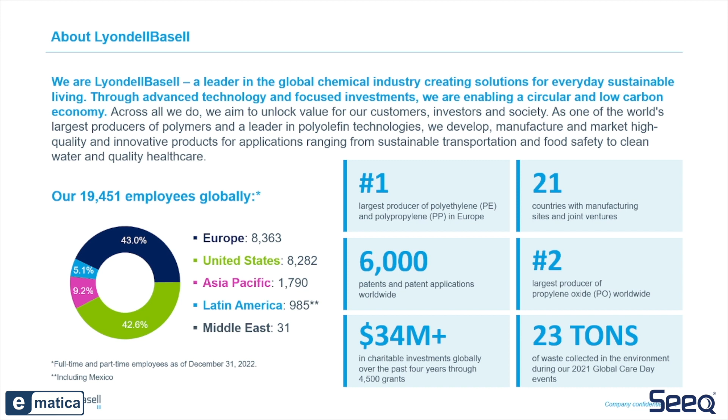Good morning, everyone. Thank you, Ematica and Seeq, for inviting us. We are LyondellBasell. Just a few words about the company for those who don't know us. We are a company that's going through a huge sustainability revolution like all chemical industry companies. And despite that, we are among the main leaders of polyolefin manufacturers in Europe. We have 20,000 employees distributed between the United States and Europe and a small percentage in South America and Asia.

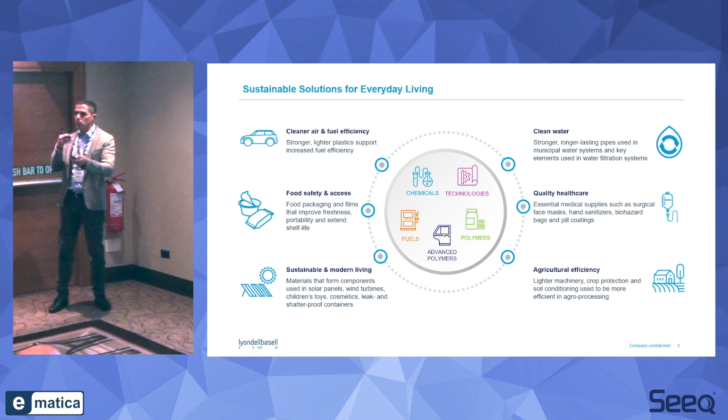Where can you find our products in your daily life? Pretty much everywhere. In cars, both inside and outside. In food products for food safety and access. Caps, closures that you find on bottles, for example, or yogurt packagings. Healthcare, so hand sanitizers, biohazard bags, pill coatings, renewable energy tools and parts of machinery. So pretty much everywhere.

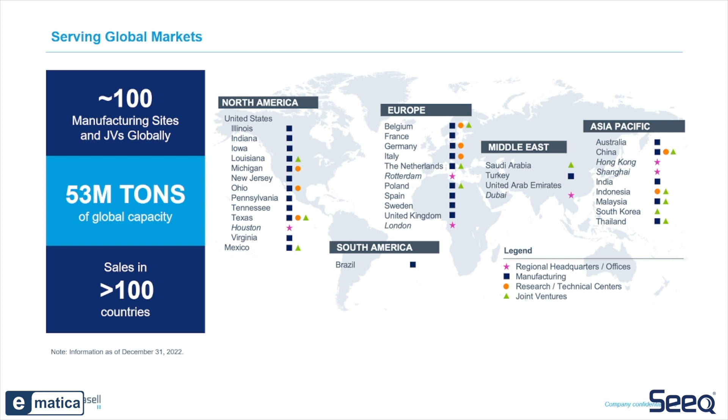And where are we? We have more than 100 manufacturing sites all over the world, with more than 50 million tons of global capacity. We work in Ferrara, the main site in Italy. And in Ferrara, where we work, we have one of the main research centers. Let's switch to our use case, which was started from the need to have a predictive machine for hazard situations. Marco is going to explain you later how the server works.

We used our data structure. We are very old PI clients. And after PI, we have an AF server. And data are collected from different sources, from an OPC server in our case. And above AF servers, we also have a couple of servers, Seeq server and a Data Lab server. And that's because our data are confidential. So we need to have our data infrastructure safe.

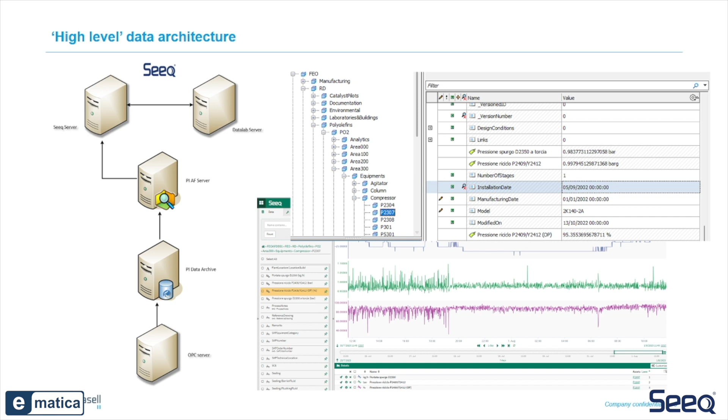This allowed us to import data very easily. We imported some data from PI, but most of the data were imported towards AF, which is way more comfortable to do, so that with Seeq and its Workbench, we could work on them. Now I'm going to leave the floor to Marco, who's going to tell you more about how we did it.

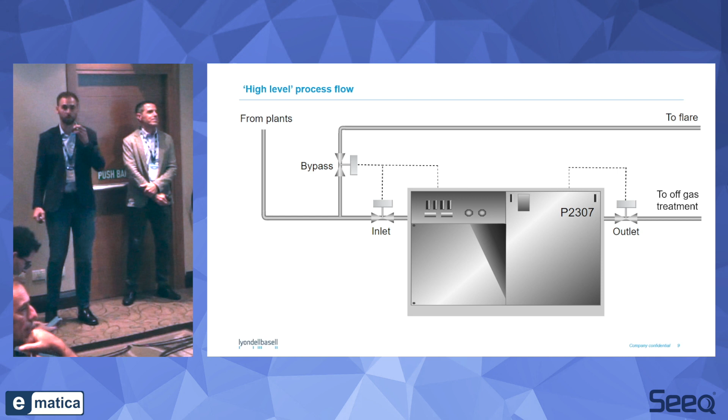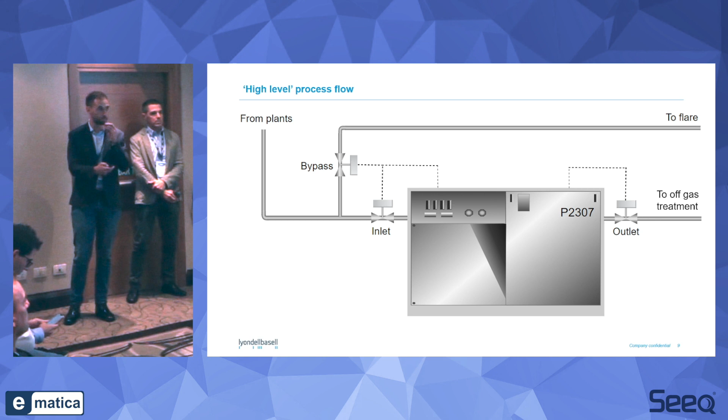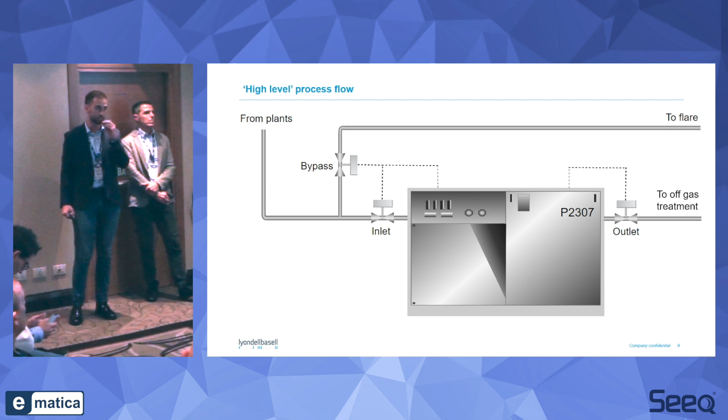Thank you, Roberto, for your introduction and for this overview about the data architecture. My name is Marco Bassetto, and I deal with pilot plants and labs. This use case that we are going to present is a case of reliability of the off-gas treatment compressor. This compressor receives off-gas from pilot plants. It compresses them from an initial pressure to a final pressure, and then sends them to a distillation center.

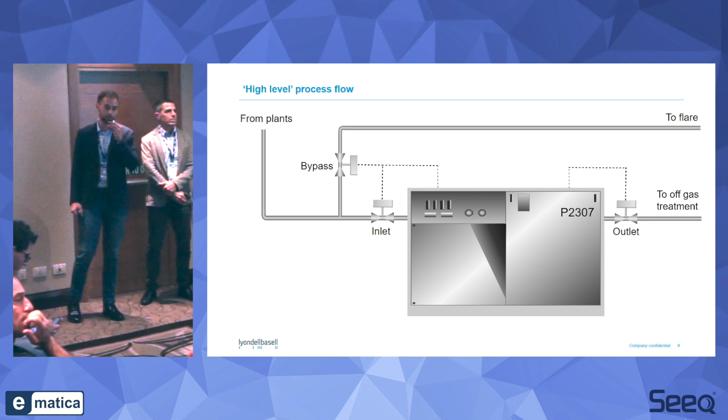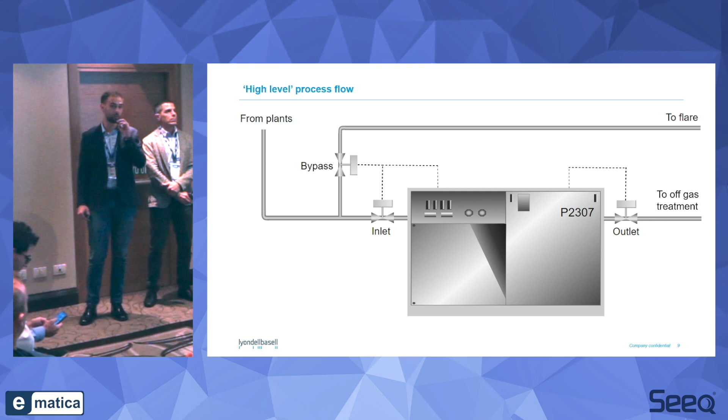When this compressor switches off unexpectedly, the off-gas must be sent to flare instead of treatment. So if this happens, we lose that fraction of polyolefin because we have blends of raw material, so that's a cost. And we also lose thermal energy. So, if we switch to the use case, the off-gas compressor stopped 5 times last summer. And this is why the goal of our use case was to create a model that could identify the input variables of the compressor, thus predicting future stops.

The project was completed following these steps. So first we identified the model input variables in Data Lab for the compressor status. So basically we obtained the machine learning inputs, and then we switched to the training phase of the model based on a supervised algorithm consisting in a random forest classifier that will identify operational conditions that might compromise the compressor functioning.

And after the validation of the model, we implemented it. The model can be deployed both offline to identify the root cause of failures in Workbench, but it can also be deployed online with a dashboard that helps operators preventing failures real time and also monitoring the machine status and also making decisions in case it is necessary.

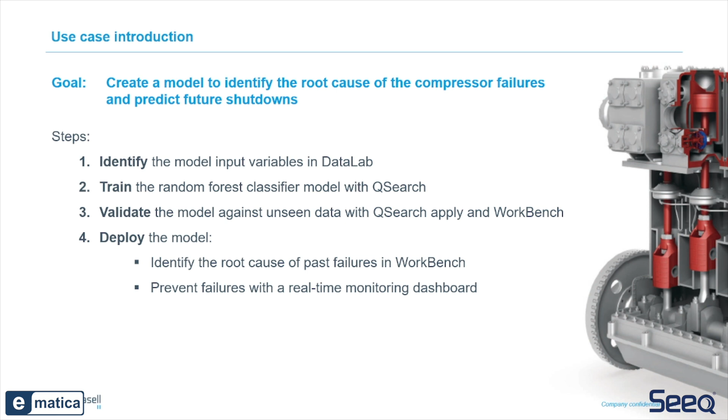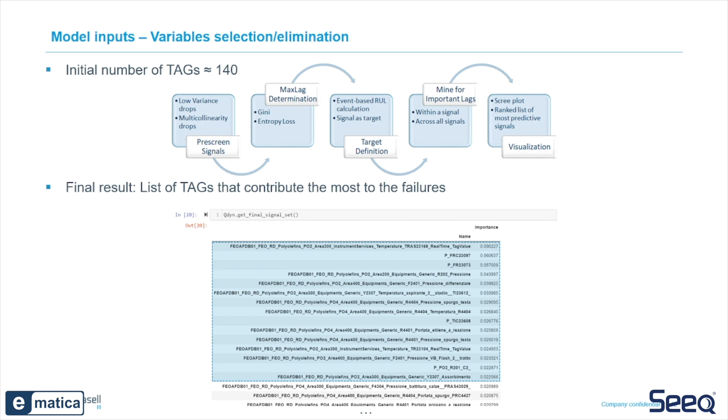So let's switch to a more detailed description of our model inputs. We select variables of the model. You might think that operators work on the plant daily, and so it is easy to identify root causes of an arrest. But actually, as Roberto said, we work in a research center, so we work with pilot plants, which are conceived to be flexible, of course. However, there can be many variables, such as composition, temperature, and other types of variations, which is why sometimes it is not only one deviation or one signal that can be easily identified with the Workbench causing the compressor's failure, but also a combination of multiple factors. So we adopted a hybrid approach.

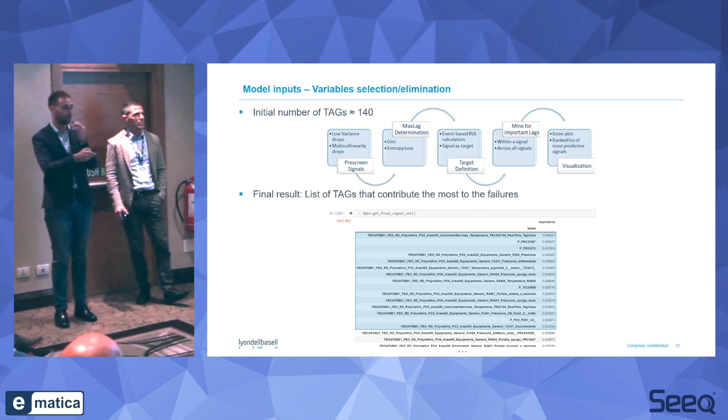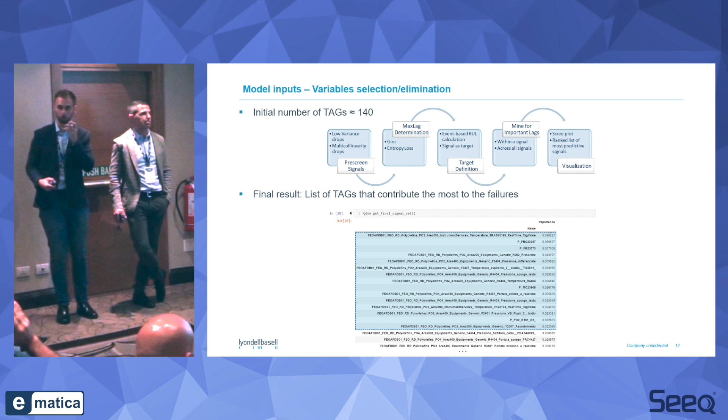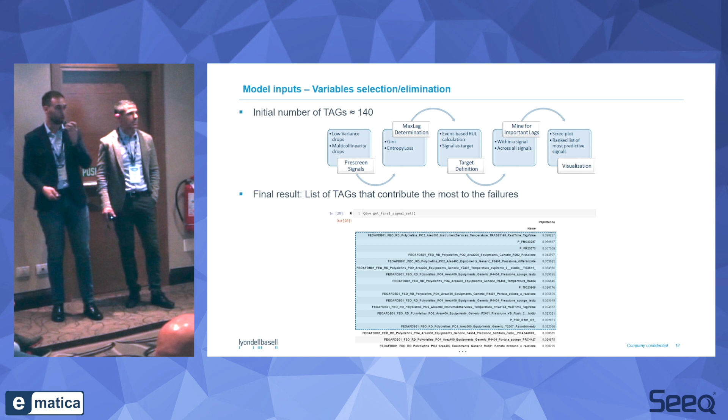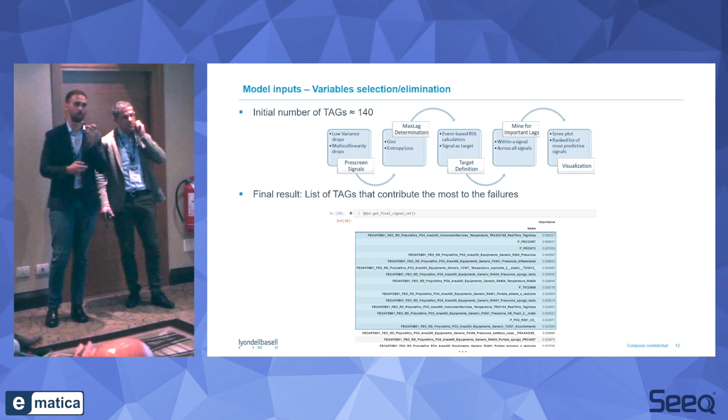As you can see, the outcome of this script is a list of signals that have a score based on their importance. So we chose as model inputs the first 15 signals, and we also added some more signals based on our practical plant experience, which is why I defined this approach hybrid. We matched the machine learning with our own experience.

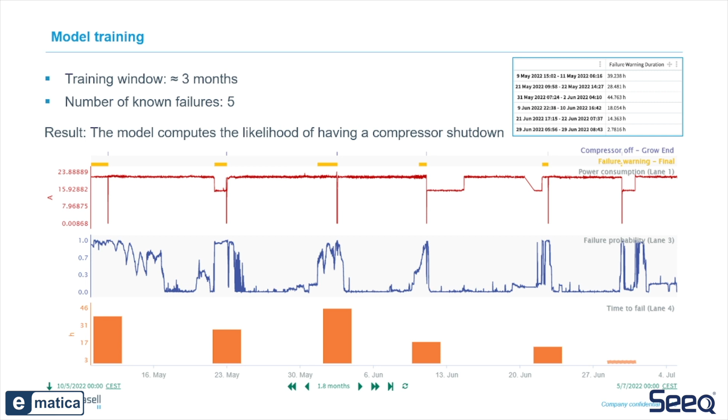Here, there are some capsules that represent time frames where the alarm would have been active before the actual compressor shutdown. And to the right, you can see the duration, the anticipation with which the model would have warned of a possible shutdown.

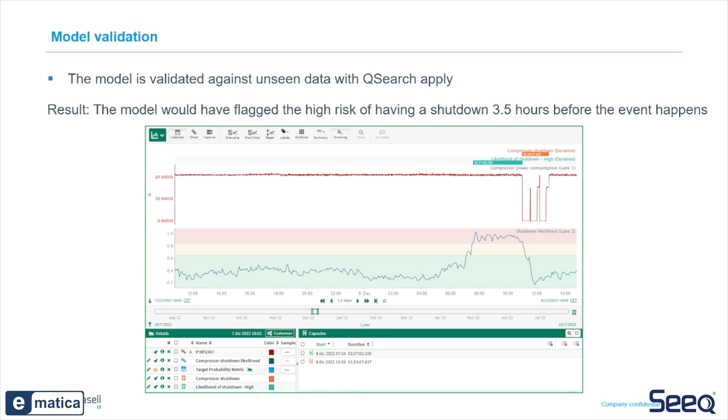The model was then validated against unseen data with the application of QSearch, thus training the algorithm. You can see here December and the pattern of the likelihood of failure before the actual shutdown. So this proved that the model was reliable and we could proceed to the other phase of implementation.

A few slides ago, we showed you a blue trend that represented the likelihood of a shutdown of the compressor. This trend can actually be divided into sub-trends that represent the contribution of each variable used as model input to the likelihood of compressor shutdown. Of course, this could look confusing, adding 15 or 25 other inputs. So it is more convenient to keep the trend view for the global likelihood of a shutdown and use the monitoring of each variable.

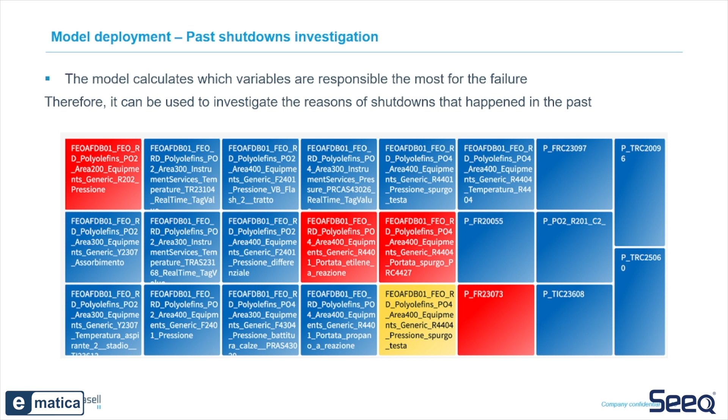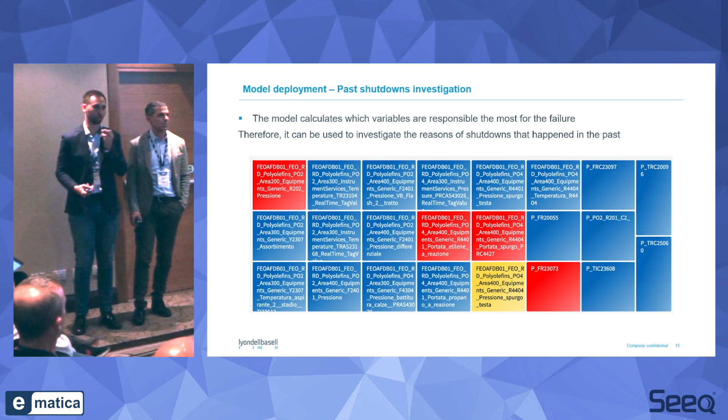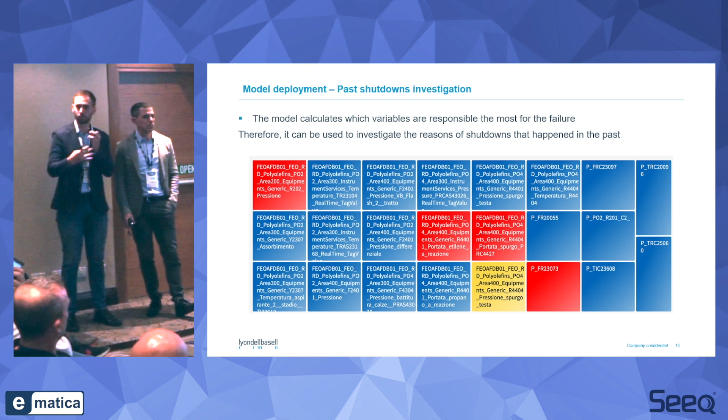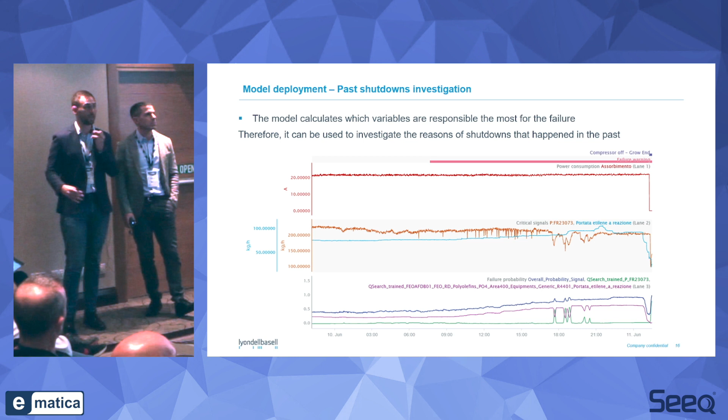So the color represents the intensity of a variable and how it is contributing to increasing the risk. And of course, the red variables represent the most critical situations, the variables that are mostly impacting in increasing the likelihood of a shutdown. So the model can be used offline, generating these maps in a context of past failures, to quickly identify the red variables, the ones that cause the shutdown. And then once you have identified these variables, you can take a further step analyzing the trends.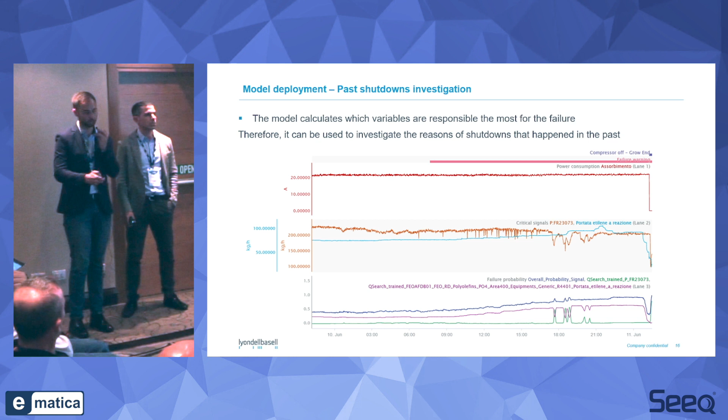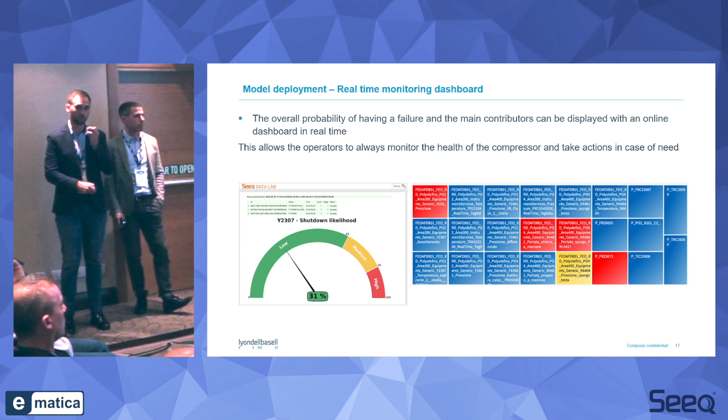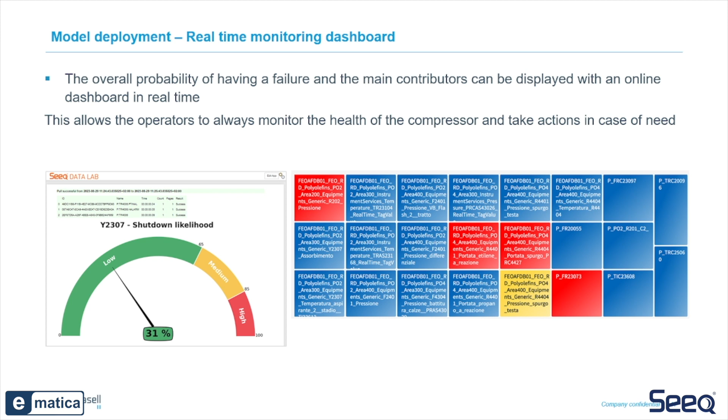As I was saying before, the model can also be used online through this dashboard that you can see. So on the left, we have an indicator that represents the global failure, and you can monitor the well-being of a machine in real time, and if something happens, this indicator goes towards the red zone, thus quickly identifying the variables that are putting the machine in danger.

So after this deployment, we switched to fine-tuning the model and some ideas that we could use in the future. For the fine-tuning, basically, the model was improved and can still be improved by tuning the model parameters by trial and error. And every time a new failure occurs, hopefully it never occurs, but when it does, the model can be updated each time, adding the new data to the training set.

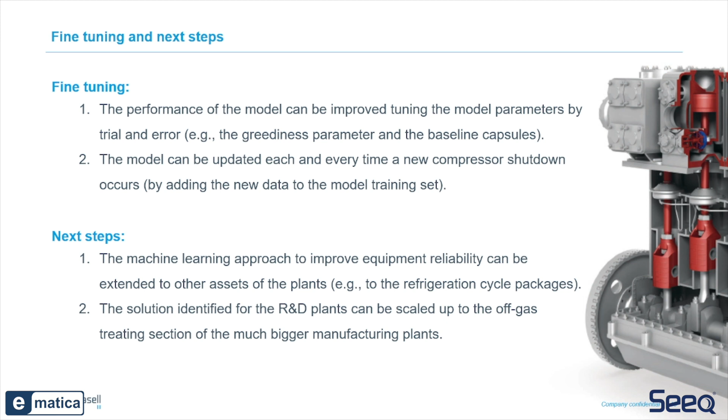And regarding future projects, we want to use this machine learning approach to also improve other equipment reliability, for example, the refrigeration cycle packages. And we also want to scale up this solution that we identified in the R&D center to other production plants. I'm going to leave the floor to Roberto for some final comments.

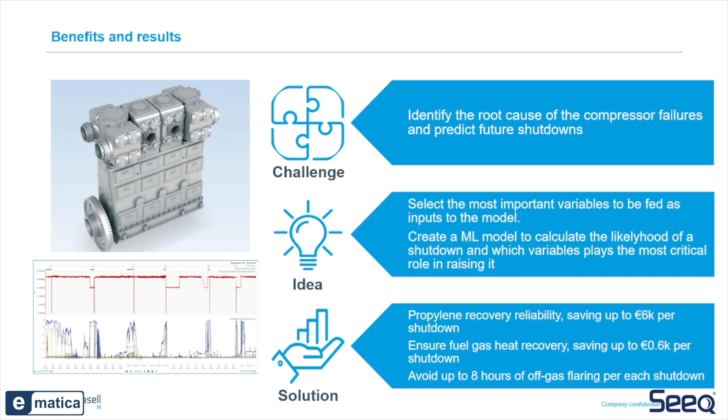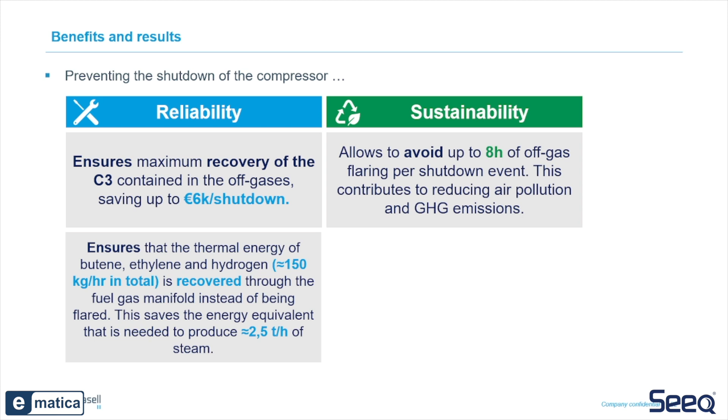So, a summary of our use case. We wanted something that could improve our compressor's reliability, so we selected our algorithm and implemented our model, obtaining some results. Just an introduction before talking about positive consequences. We said that the operators couldn't understand why a compressor would shut down, so we gave our machine learning algorithm some information. Last summer, it stopped 5 times. Operators were busy doing other things, and they cannot spend all day checking the machine.

We believe that being able to create predictive machines can really be the way towards a faster and easier implementation of machine learning in production. Reliability ensures a recovery of C3 contained in the off gases, saving up to 6,000 euros for each shutdown. With shutdowns, we usually waste not only money but also energy, raw materials and thermal energy in general. And we lose around 600 to 1,000 euros per hour with that type of energy loss.

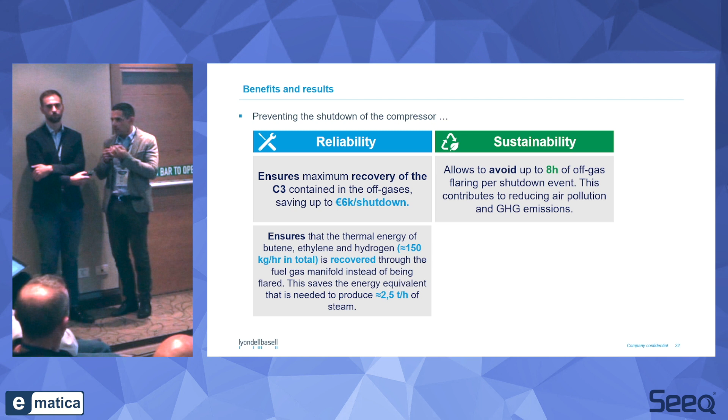If we're not able to recover them somehow, it means just burning them, turning on the torch, and more CO2 emissions. And also doing something that's criticized by public opinion, which means emitting more CO2.

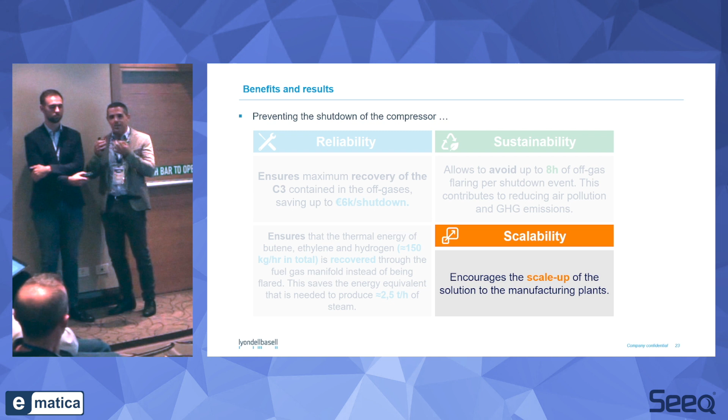So our final goal is scalability. We want to really encourage a scale-up of this solution to other manufacturing plants, showing people that we can extend this idea to other compressors in the world. We're talking about dozens of thousands of cars and machines, and we really hope we can make this solution more popular. Thank you.